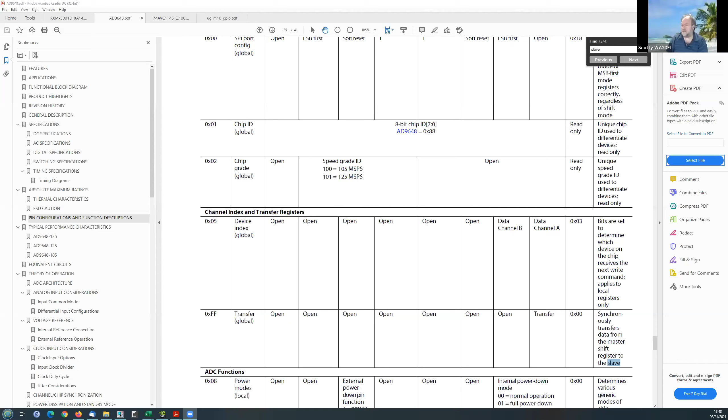I have to bring up the spec on the part, but if you're dropping from 3.3 down to 1.8, you got 1.5 volts of drop at 100 mils is 150 milliwatts. So you have a little bit of thermal to worry about. Yeah, so if I can share my screen here, I will show you. This one here. This is the data sheet for the part, if I got the right screen.

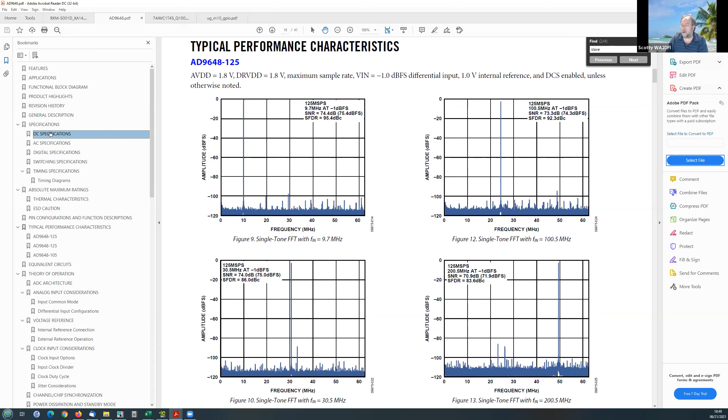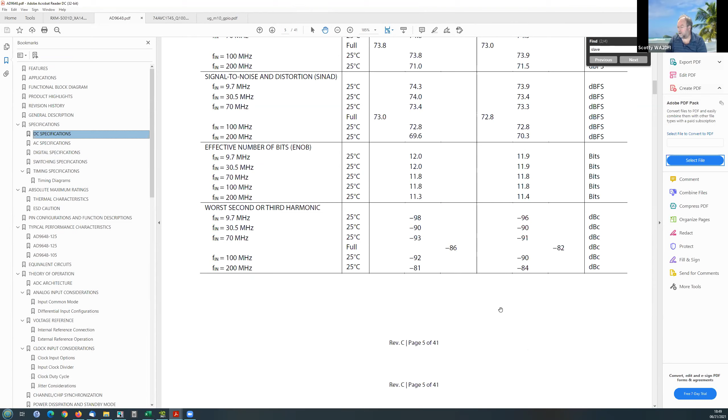Okay. And let's see. No, that's not what I want. I want up here. It's on page 6. Page 4. Oh, okay. Sure. Yeah, I was on the right page, I think, back here. Oh, there it is. Right there, right? Yeah. IDRVDD, 20 milliamps. That's not really much there. And actually, it'll be this one here because we're doing LVDS, right? Right. And then there is the analog one, which is just under 100 milliamps. That's this one right here.

Yeah, okay. So this is what your current regulator supplies. Yes. And this is what you were taking off of the pin on the connector, right? Yeah, I don't remember. I think that's where the 1.8 was coming from. Yeah, that's where it's coming from. So now we'll have 2 separate regulators, preserve the circuitry for this, and then use another regulator for the digital, so we don't get any noise in it.

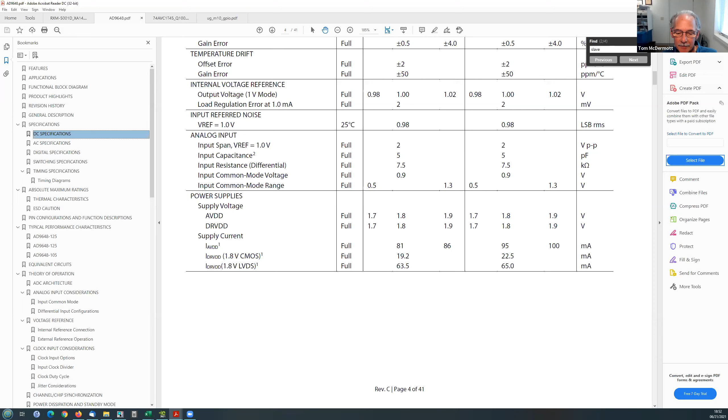Hey, did you see where the Starlink dishes have been failing in Phoenix? No. Yeah, over temp. I'm not surprised. They have a 50C cutoff. 50C, we can get 50C ambient out here.

Okay, let me go look at the sync pin and get back to you. Okay, sounds good. Thanks. I cannot stop sharing this now.

I have a quick question for Dave Witten or Dave Larson. What's the minimum Raspberry Pi needed for the magnetometers? I'd say a Raspberry Pi 3. A Raspberry Pi 3. Okay. So if I have a Raspberry Pi 3 sitting in my garage doing nothing, there's no reason for me to buy anything better? No, I don't know of any reason. Why would a 2 not work? It's not working very hard.

But I was just not sure how different they are. I don't know if anybody's been testing on it. Maybe Jules. From what I know, the 3s and the 4s and the 0s are electrically the most alike, isn't that right? The 1s and the 2s are different. And our magnetometer is the size of a 0, so it'd be cool to see if it would actually work with a Pi 0.

Scotty, yeah, I wanted to ask if that design you were working on last week, the layout of the board, is anywhere where I can look at it and get the measurements off of it. It's nowhere, but I can send it to you. That would be really appreciated.

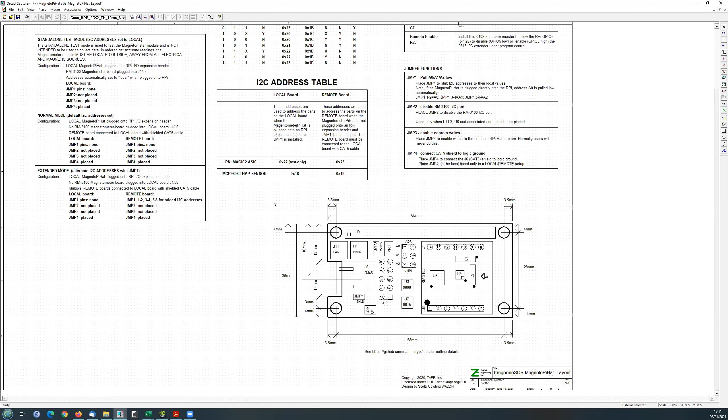So I thought they usually just weighed the tanks. Yeah, maybe the little ones. It's the little ones anyway. Yeah, not the big ones in your backyard. You can't do that at your house. Well, this is like a 10-foot wide one that buries in the ground to supply your whole house. Because we don't have gas at the new location because they're up against the mountain, and they won't run a gas line just to my house. I don't know. But they won't, so I have to supply my own.

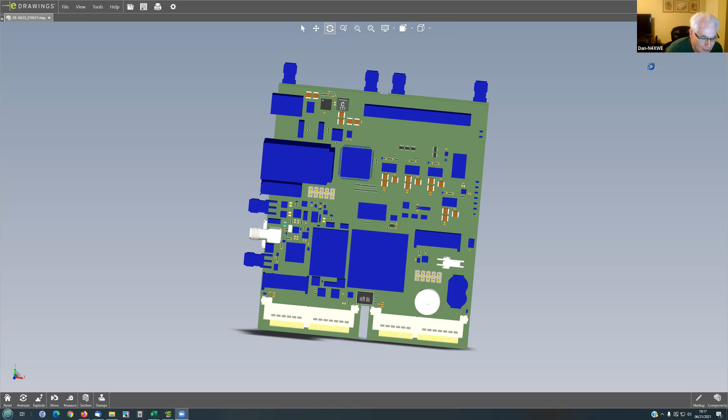Oh, hey, let me share my screen. Now that everybody's gone, let me share my screen once more and show you. This is really cool. Could you see that? Yeah. That is the 3D model of the data engine with the RF modules plugged on the back. Very nice. So does it come through okay? Yeah, it comes through great. You can see everything that's going on there.

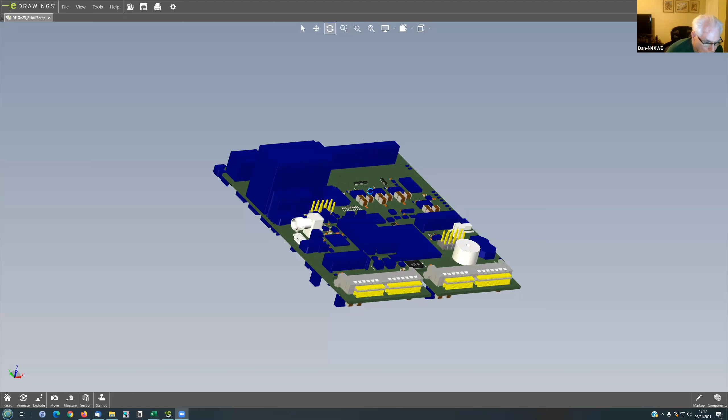So these big tall guys here are the two RJ45s. This is the vertically mounted Ethernet or USB 2. The USB 3 is actually, see if I get this right, this connector right here underneath the SMA. Oh, okay, yeah. That's a USB 3, a micro USB 3.

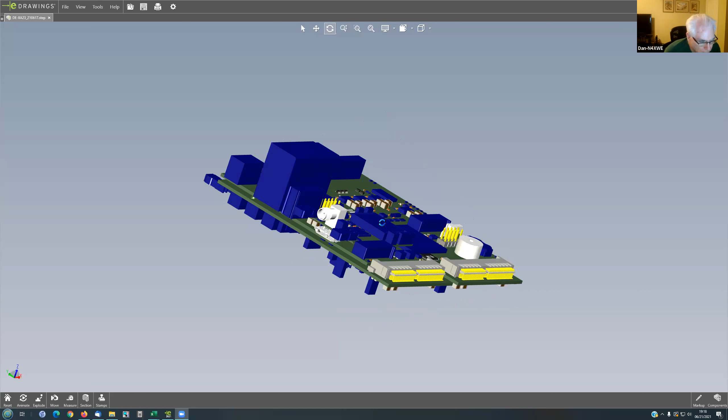And then these are not correct. These are all SMAs, this one and this one. But this is a through-hole SMA, and these two are surface mount SMA. We didn't have enough room back here behind it to put another SMT one in. And he didn't have a 3D model for the SMT ones, so they come out as pancake looking ones. You can see how they're squashed flat, but they're really supposed to be SMAs.

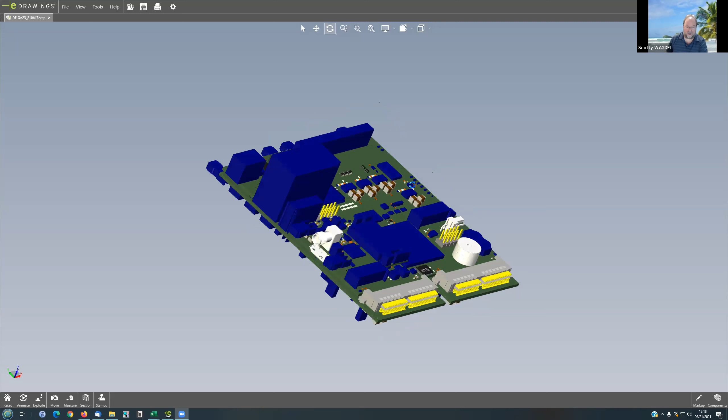So can you buy them as SMAs, but with mounting pins that are through-hole? Yeah, in fact, if you look at this one here, you can see the through-hole pins. Oh, okay. And so we're going to have to instruct the manufacturer to cut the pins off so that they don't interfere with the USB port down here. Yeah, for sure. But there's just no other way we could do it. There was not enough room, as you can see all the parts right here.

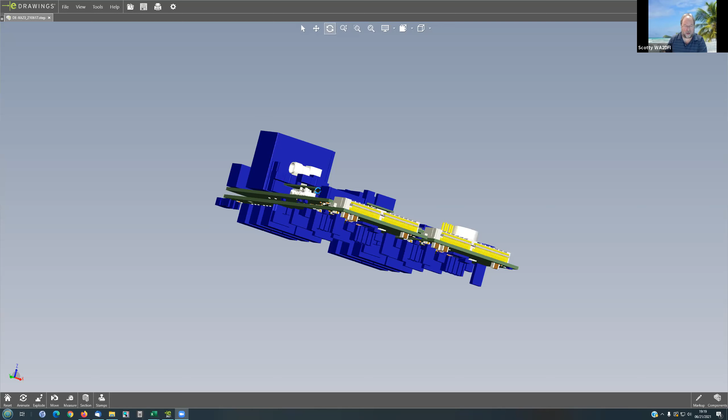And these are through-hole or end launch off the side of the board. The problem is that, he doesn't show it here, but they actually have a metal piece that comes down and goes underneath. Right, because the board slides into a slot on the SMA connector. This is the clock module right here, and this is a .031 thick board. From there, I can see the connector actually overhangs the board just a little bit. Yeah, and you can see here's the outline of the board. It goes along right here, down here. So there's the corner cutout right here.

And the leaf board comes down like this and sticks into this, the M.2 connector for it. The leaf board is not shown on here. And then all these parts here are the power supplies, 1, 2, 3, 4 low voltage power supplies, and the main power supply is up here in the corner. And that's the power in connector. These 4 SMAs are on the RF modules that are plugged on here, and here's the other end of the RF modules with their 140 pin connectors.

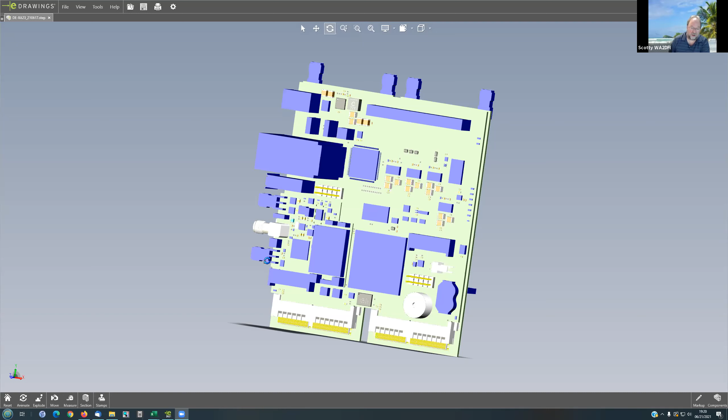This is a battery holder. This is a buzzer, which we're probably not going to put on. It'll be a do not install. Let's see what else. Again, the clock module's right here. So the big congestion area is along this side of the board. Fitting the clock module in between the Ethernet, the USB 2 and the board was a limiting factor.

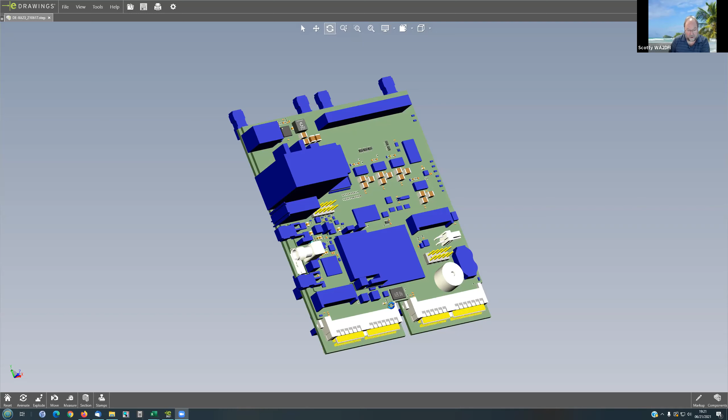We couldn't go any further north than that connector, and then we have a header here, and then we got the leaf board that cuts the corner out, so we had to chop the corner out of the clock module. Then we come back down here, it's all blue, so you can see that this is the GPS right here, and if you look underneath, you see this blue down here. That's the alternate GPS. Oh, okay. So only one of those 2 will be populated.

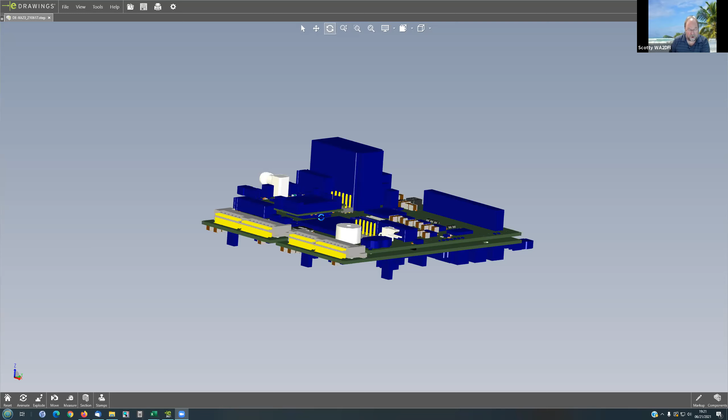Yeah. And one of them is a lot thinner than the other. So we put the fat one on top and the thin one on the bottom, and we have just enough room that we can clear the data engine, and he did a keep out underneath all that to keep the parts out from under the GPS so that it'll fit. It's really nasty because you got to marry them together and then verify you don't have any conflicts that try to occupy the same space. Yeah.

Dave says this is the hardest board he's worked on in about 2 years. So I don't know if that's a good sign or not. I'm glad I have him as our CAD guy, but it's scary when he tells you your board is complicated and the hardest one he's worked on. It's like, ugh.

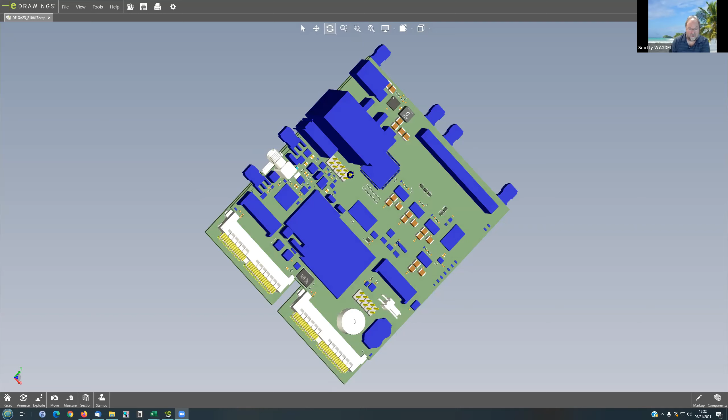This is the fan connector over here, by the way. And I think these are jumpers for configuration for just debug IO. And then this is the ByteBlaster header, the configuration header right here. And there's another couple pins somewhere. I don't see them on here, but they are for 1, 2, 3, 4, 5. Oh, it's combined in this header, I guess, because we have 5 jumper straps that we can use for configuration settings that the FPGA can read. Yeah.

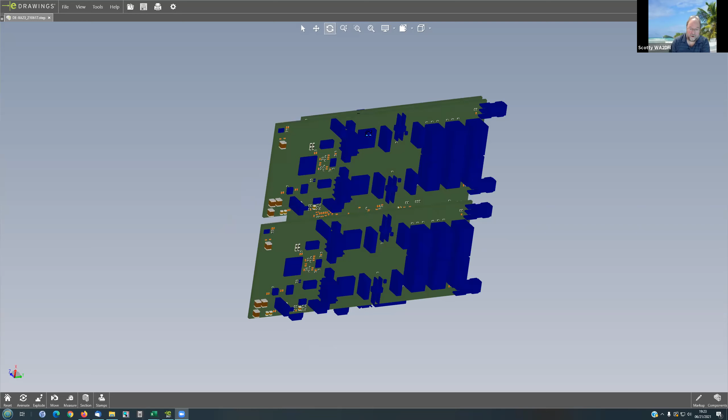So anyway, why would you use jumpers like that instead of a little switch? I hate switches and jumpers. This is a 9-cent part. Oh, so yeah, switches are obviously more expensive and probably more prone to failure. Probably we won't even use this. I mean, I had the extra IO, so I ran it out to a header so that we could. Yeah.

I mean, a lot of this stuff I don't really have a use for. It's just like, well, okay, we did it on the Hermes, or one of the other boards we did. Like this buzzer, I stole this off of the Lime SDR. Oh, okay. I don't even know what we'd use a buzzer for, but they had one, so I put one on there. Okay. But we'll just leave it off. It's there if we need it, and we generally won't use it.

And then this is the real-time clock, I think, right in here that this battery runs. I debated whether to put that on there because I think the Pi has a real-time clock, but it's an option, right? Yeah. So you have to buy it and hook it on, and it runs on the I2C or something. Yeah, it actually hooks onto the GPIO header. Okay. And it's pins, I think 1, 3, 4, and 6 or something like that. Maybe it's 1, 3, 5, and 7. 3 and 5 is I2C. Okay, and 1 I think is 5 volts.

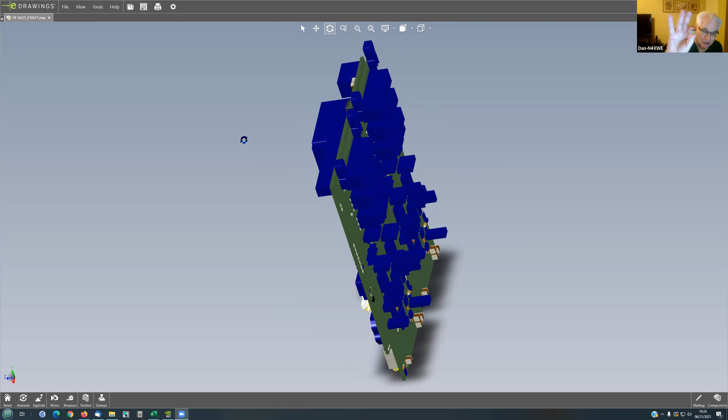There are 5 pins in a row. Okay. Actually, I've got one here. So I think 1 is 5 volts and 7 is ground, maybe, or 9 is ground. Maybe it's 2, 4, 6, and 8. I'm not sure, but this is what it looks like. You can see, wow, it's microscopic, and it plugs right on the header. Yeah, this black piece on here is a little connector. It's like a 4-pin connector, and there's not much on it. There's a battery, which is the little thing inside the yellow circle. And then the rest of it is just an IC and a couple of resistors, looks like, and a capacitor.

Well, at any rate, I put that kind of circuitry on here because the entire circuitry, if you use a battery holder, which is just a clip, and the crystal and the real-time clock, it's under $2 for all the parts. Yeah, these are really inexpensive. This is, I think, the latest and greatest chip. There are 4 or 5 different kinds of chips for real-time clocks. But I think I paid like $5 for 4 of these. So it's hardly worth even putting it on our board.

Yeah, the only problem is that if you have an enclosure, well, it won't be a problem with this board, but on a lot of boards, the enclosure doesn't clear the header well enough that you could stick this in. Oh. So then you can't use any kind of enclosure that's stock. Exactly. You can't use a ready-made enclosure. You have to use something special. Yeah, because I have like a Flirc enclosure for my Raspberry Pi 4, and that's what I really bought this for. But I can't use it on the 4 because the enclosure doesn't allow it to fit in.

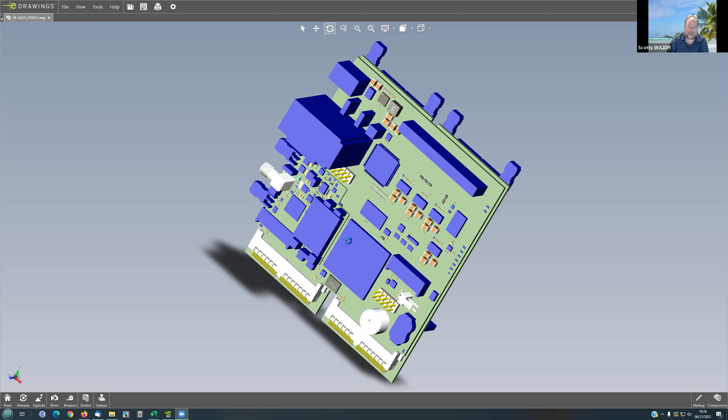Yeah. Well, what I'm envisioning for an enclosure for this is a clamshell with a pedestal inside for these two parts. This is the memory and this is the FPGA. And then it would need on the back, the ADC is this guy right here. Yeah. And I'm not sure what these are. Oh, these are the preamps. So these are the only parts that draw any kind of current. So you could theoretically put a pedestal here, but then this is the connector for the optional filter. So you're going to have to leave an opening here to be able to plug that in if you want to use it. Yeah.

So anyway, these are the relays up here. And these select the noise source or the attenuators for the RF module.

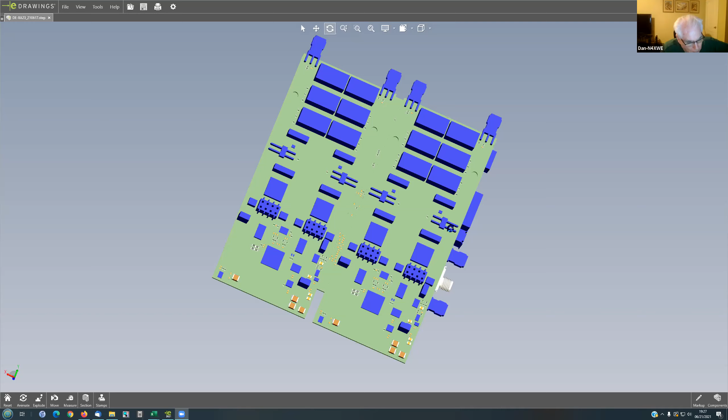And then this is a power header if you want to run a preamp on these headers here. This jumper is the power in. This connects the grounds, I should say. Normally you don't want to connect any grounds on the through filters. You want it to be isolated. And I take that back. Obviously you've got to have ground on it, but you don't want that ground connected to power ground. And so it's an isolated ground.

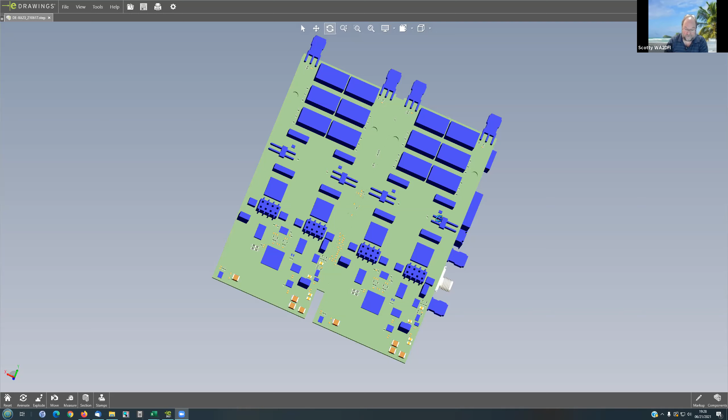But if you want to put a preamp on there, you can't get power to it because the ground has to be connected together. So that's what these jumpers do here. They allow you to feed power to the filter board so that you can put a preamp on there if you wanted to. So I think it's looking pretty good as far as how it's all going to fit together.

Well, there's no reason you couldn't do a 3D printed enclosure for that. No, except that you want it out of metal if you're going to heat sink it. Well, yeah, that's probably true. What we could do is put stick-on heat sinks on these two parts and just run a fan. We have a fan connector, so we can do that.

And actually, interestingly enough, if you were to use a leaf module with a fan on it that blew down through the board, it would come out and go right across these two parts. So you could make a leaf module that had a fan on it, and that's all its function would be. Well, Pimoroni does a little fan that's set up like that. So is it a Raspberry Pi hat with a fan on it? Yeah. You could do that, and you don't even need this connector here. You could run it right off of the Pi.

Because I put some additional voltages on this connector, so if you wanted to build something that used 12 volts, you have it available on that connector. So you have more power. Yeah, more power, more happy. And then the idea was I kept these down as low as I could so that this area here is for the VLF module front end, to keep it away from the power supplies, up near the connector here. And then as soon as you go digital, all the rest of this down to the connector doesn't matter about picking up noise, being digital.

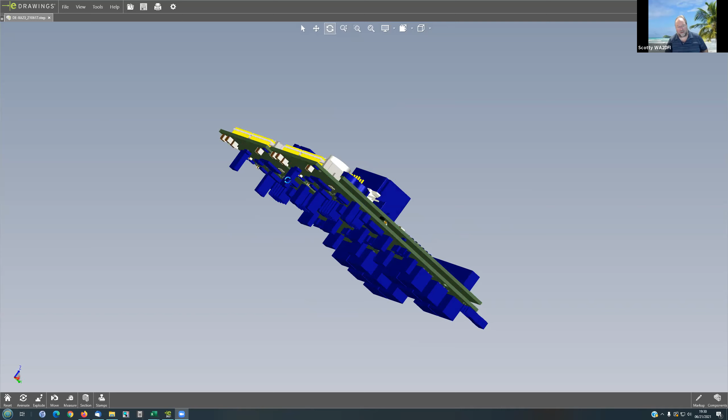Anyway, that's it. It was sitting up here on my screen, and I should have brought this up for everybody to look at; people would have been excited about that. Yeah, this is amazing. This is an eDrawings viewer. And so Dave made these from the CAD program. All of these are actual heights of components that I put in when I built the parts. They're black boxes, so that's why these come out looking so weird. It's like an envelope shape.

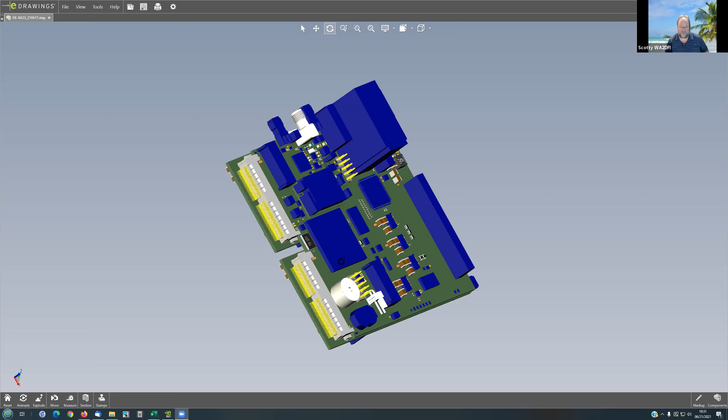An envelope shape, right. But you can see, when you look in here, the parts that are on the back of one and on the front of the other. Ideally, you can look through here and see that there's nothing that exceeds the center line between the two boards, except up here, you may have a problem. So I actually made a list of all of the parts on the board that are taller than half the gap. And then we're going to check each one individually to make sure that there's nothing above it if it's on the top, or below it if it's on the bottom.

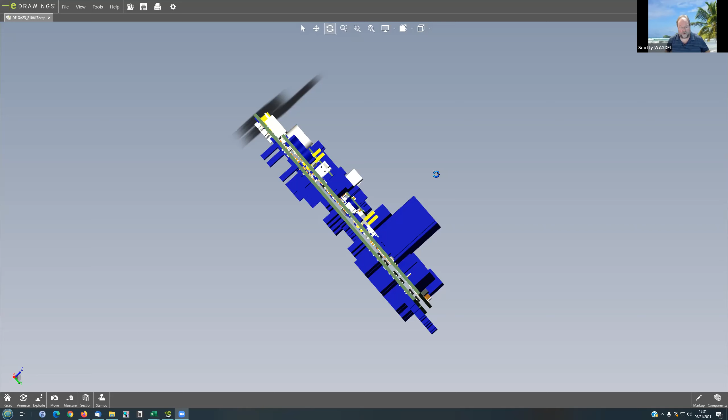I can't believe how tall this Ethernet stack thing is. Well, compared to other stuff, RJ45s are pretty massive connectors. But if we had only one, that would be the tallest part along with the USB 2. Well, next week I'll show this off and it'll be completed. So it'll be something for everybody to look at.

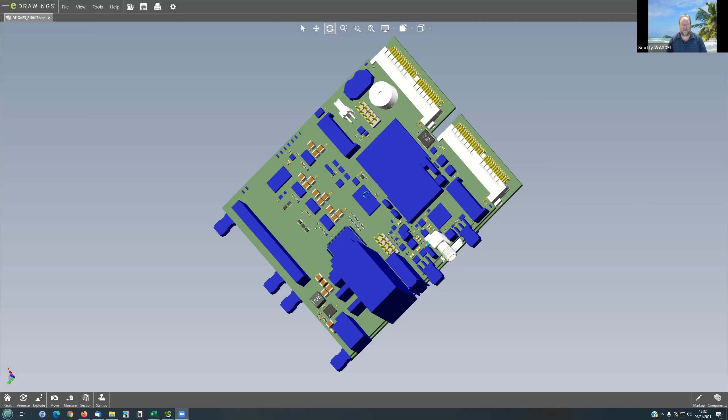Gotta go mow the lawn. Oh yeah, mine needs it too, and I just haven't been brave enough to do it. Well, we got irrigation Sunday, so I have to wait probably till Wednesday. It's supposed to be cloudy Tuesday because it's supposed to rain, so it's only going to be like 107 or something. So that'll be the day that I'll go out and mow. I think I'll hire Oliver Douglas to come out and mow my lawn with his tractor.